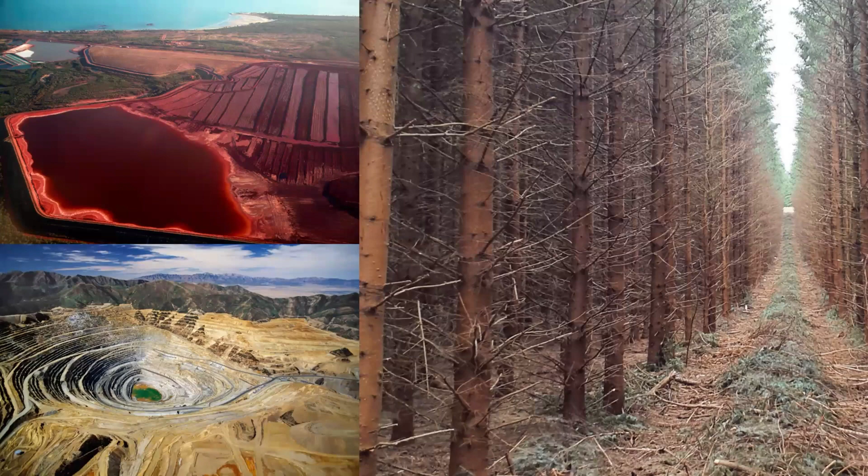But we do know some things. So what do we know about biodiversity impact offsite? We know that steel making is an energy and chemically intensive process which requires mining for raw materials. We know that concrete production requires quarrying of limestone and aggregates if it's not recycled. And we know timber can be grown in monocultures, which don't support biodiversity, and can be in areas of forest that have been cleared for production. We know that the consumption of all these materials is set to increase in the coming years. So we know that in our consumption of materials in the construction industry, we're impacting biodiversity.

But biodiversity is in crisis. We have entered our 6th mass extinction event, which is the first caused by human activity. Previous mass extinction events have wiped out 95% of all species, and it's taken ecosystems millions of years to recover from them. In the UK, we have led the world in biodiversity destruction, and we're one of the most biodiversity depleted countries in the world.

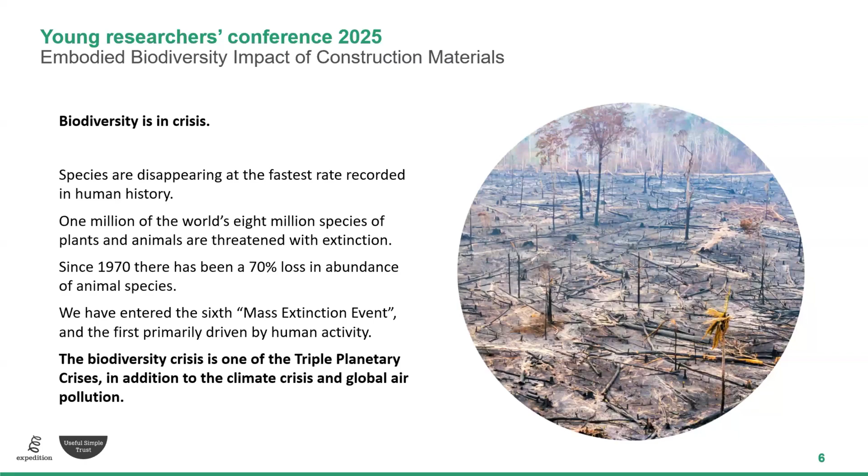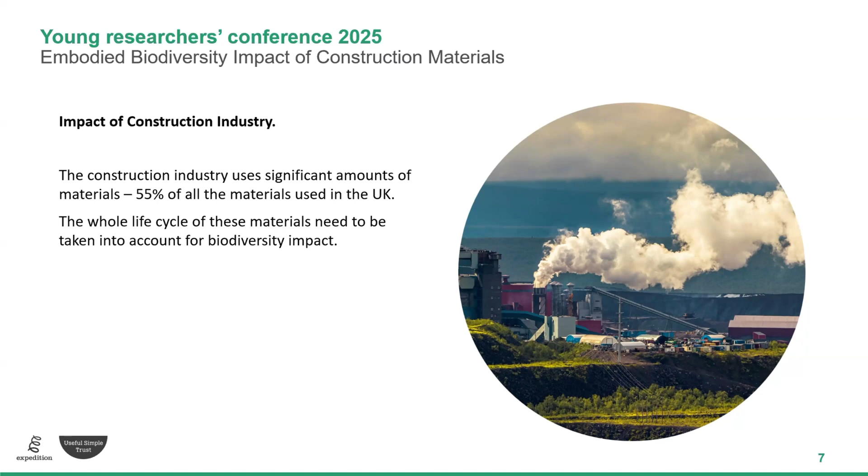And the construction industry has been a part of that, a significant contributor. The World Economic Forum identified the built environment as one of the 3 systems responsible for over 80% of global biodiversity loss. Infrastructure in the built environment impacted 29% of threatened and near threatened species, they reported. So as well as there being a big magnitude of impact from the built environment, it's happening in sensitive places where there's precious biodiversity. So it's 2 important aspects.

All of that brings me to the research question. As I said, we're beginning to understand and change how we're affecting biodiversity on site with biodiversity net gain. But we think there's an analogous thing to operational carbon, in that we discovered embodied carbon was as important and becoming more significant as we tackled operational carbon. So what's the equivalent with biodiversity that's happening because of the life cycle of the materials we're using?

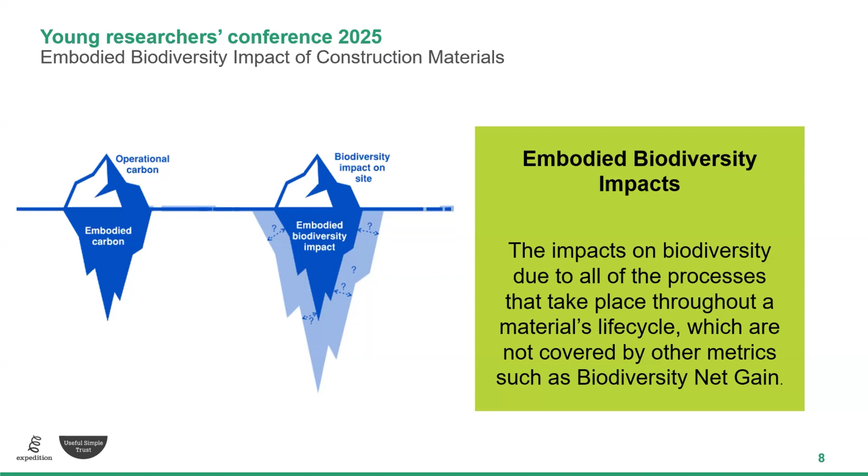So to continue that analogy, we need to think about the whole life cycle. A key difference though is that with carbon, it is released and contributes to atmospheric carbon levels, having a global effect. With biodiversity, the same activity happening in 2 different locations can have a very different level of impact. So there's a local effect, which makes it a degree more complex to quantify or measure.

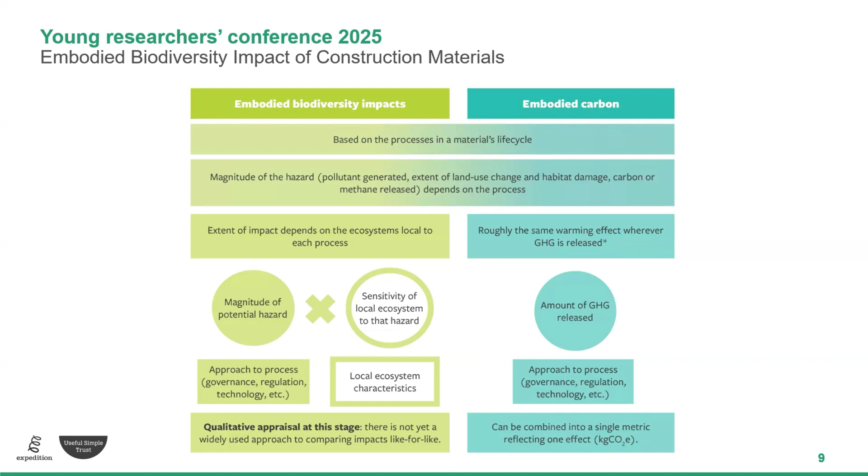So for us working in the built environment, similar to carbon, we can influence the biodiversity impact of our projects through the decisions we make about materials. We've seen how this can work with carbon, although there's lots still to be done, as talked about today. We need to broaden our focus to include biodiversity as an essential part of being a profession that's fit for the future and the challenges we face.

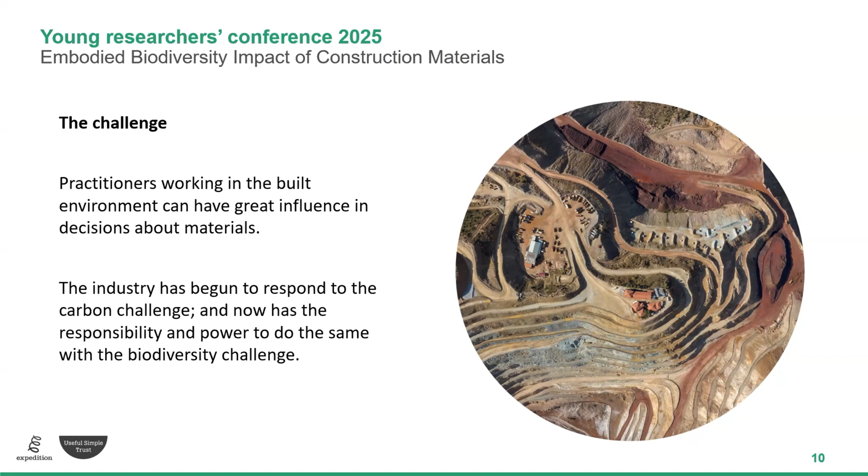So now to get onto our research a bit more - the approach we took, we wanted to draw useful conclusions for the construction industry, even though this was a very early piece of research on this topic. To do that, we adopted the COM-B model of behaviour change, considering capability, opportunity, and motivation to create behaviour change. That gave us a practical framework to draw our conclusions against, which I'll show you a bit later.

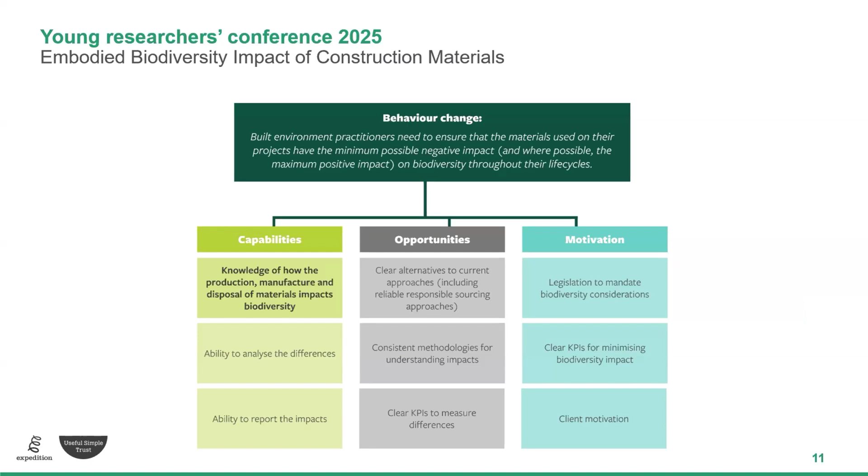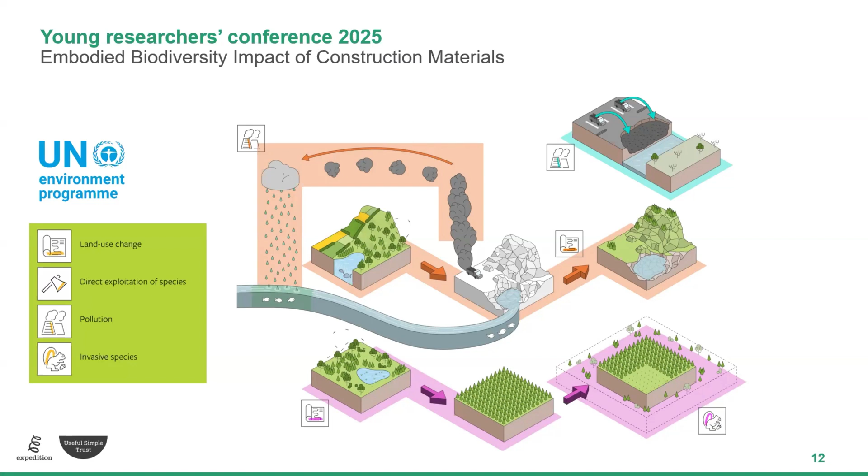In terms of the steps we took, we used the UN's 5 biodiversity pressures. You can see on the left-hand side in the green box only 4 listed - that's because the 5th is carbon, and we wanted to put that to one side for this paper. So we considered life cycle impacts on land use change, direct exploitation of species, pollution, and invasive species, and used those as lenses to look at the manufacturing, transportation, and installation processes for common construction materials.

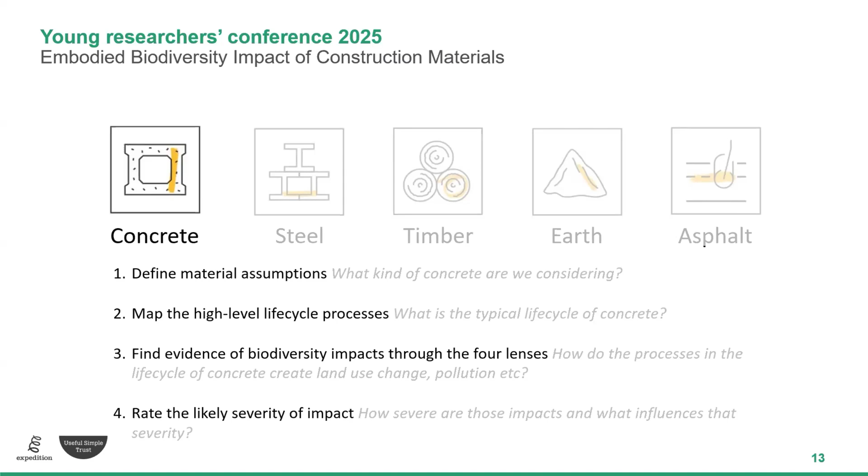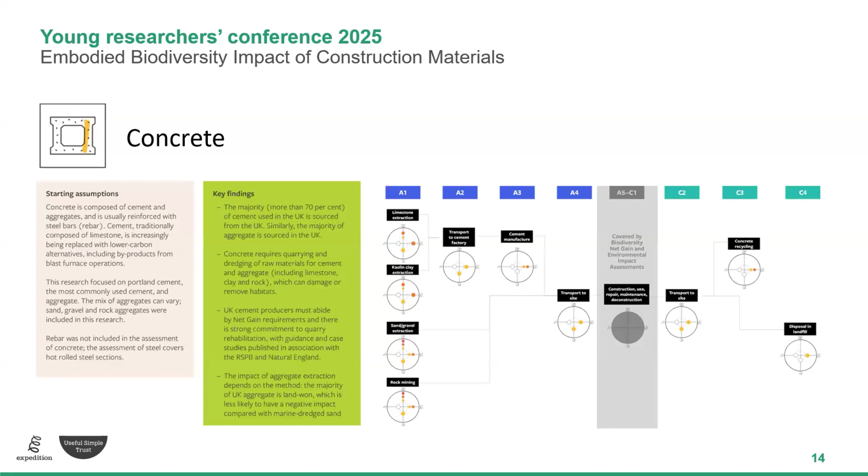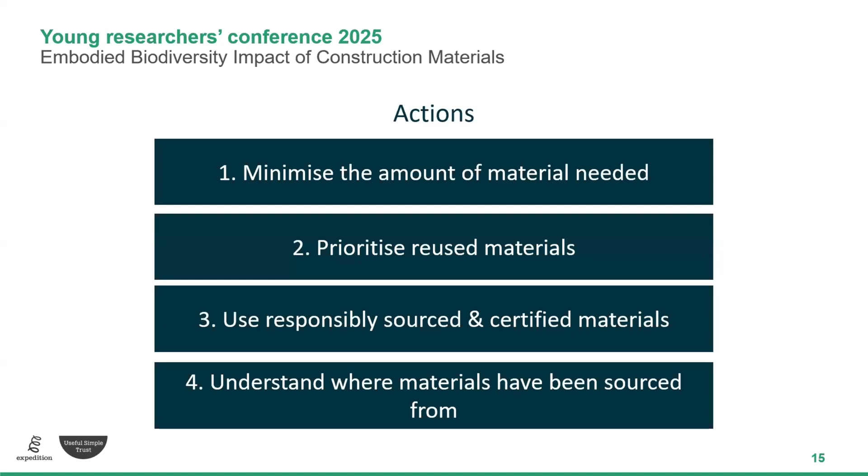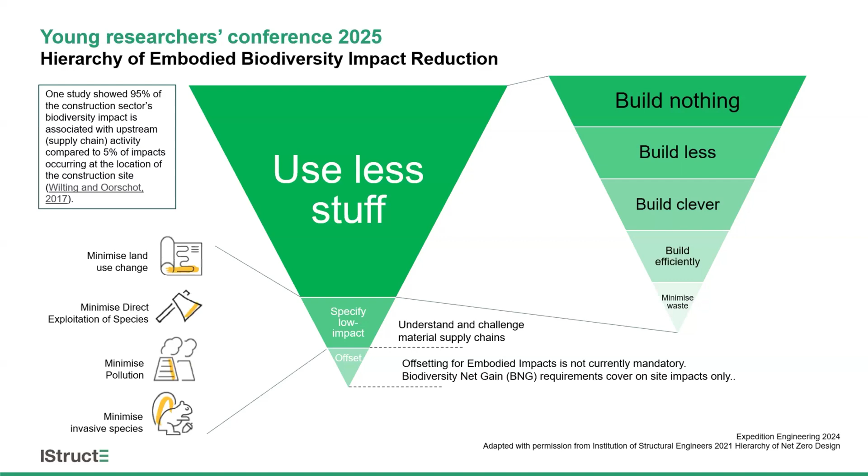So yeah, finally, to have a look at our report - like I said, also have a look at the UK GBC's Embodied Ecological Impacts website. They've done a great piece of research that sits alongside ours really nicely. Yeah, thank you.